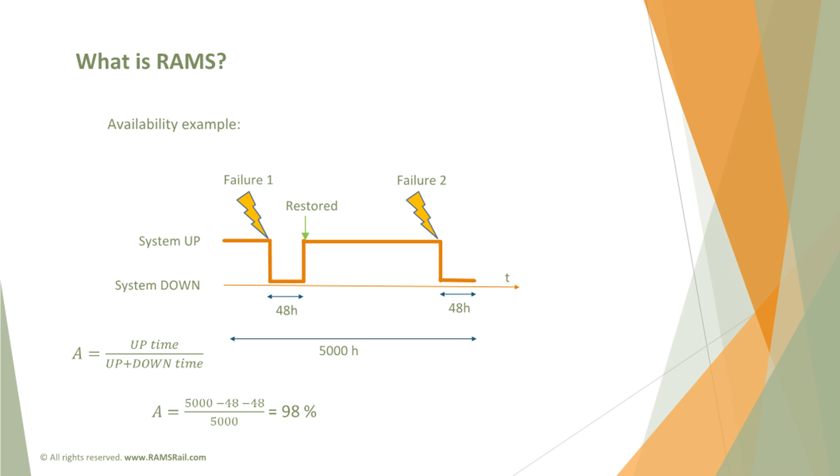A new software standard 50716, released in the end of 2023, merges and replaces the two standards we just saw. The new standard is better aligned with 50126. Readability has been improved and additional guidance added. The old software standards can still be used until October 2026. After that date, the new standard will be the only one defining the software development process for railway applications.

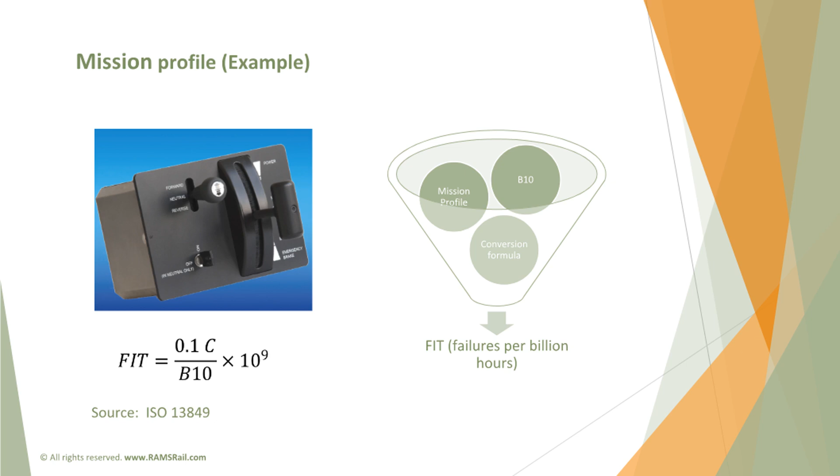The standard 50126 contains a series of tables in Annex C, suggesting the following discrete categories for the classification of the frequency. These 6 categories range from frequent, for hazards occurring more than once every 6 weeks, until highly improbable, for hazards occurring once in 100,000 years or more.

Random failure integrity is that part of the safety integrity which relates to hazardous hardware random faults. They are related to the finite reliability of hardware. Random failure integrity has to be demonstrated by a quantified assessment. This means by probabilistic calculations. This is typically done using the fault tree analysis technique. In special cases, complex systems may also be modeled using Markov chains, Monte Carlo methods, Petri nets, etc.

It is important to highlight at this point that to demonstrate the integrity of our system, it is necessary to satisfy both the systematic and the random failure integrity requirements. It is useless to end up with a system with a really small random dangerous failure rate if later we have not followed any of the techniques and measures to protect the system against systematic faults.

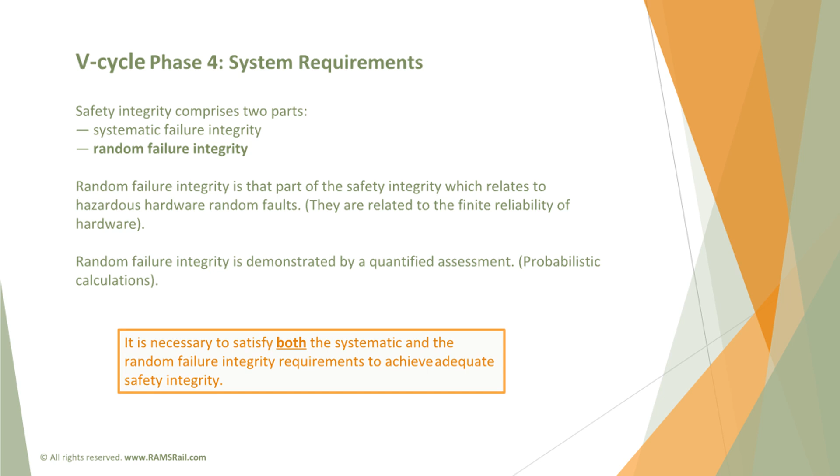A second example of THR apportionment could be the following. Let's imagine we have a level crossing which is protected by 2 fully independent functions. The first function is named lights and acoustic alert. The second function is named lower the mechanical barrier.

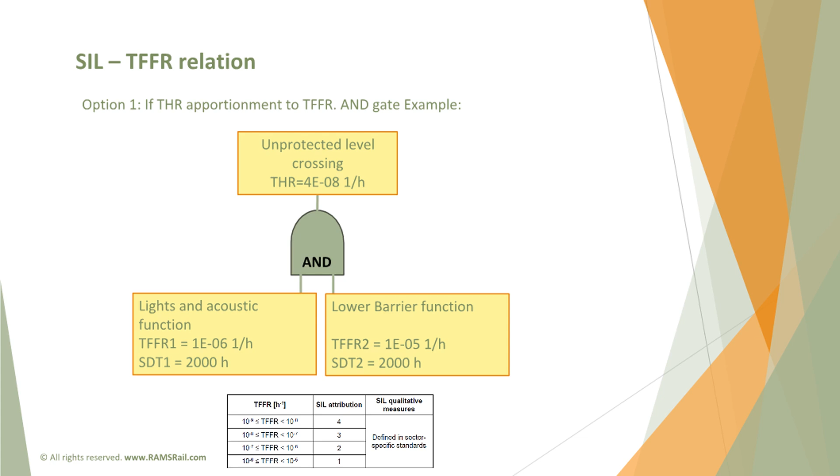If our top event is unprotected level crossing, and we assume human influence, all humans are subject to occasional lapses in performance. When they occur in earlier phases of the life cycle, they can result in systematic failures in the operational phase. When these occur in the operational and maintenance phases of the system life cycle, they could also result in random failures. Please pay attention when you apportion a THR to a function and a human. Do not overestimate humans. Do not use the SIL concept for humans, neither for mechanical parts of the system. Risks related to mechanical parts of the system will typically be managed via codes of practice.

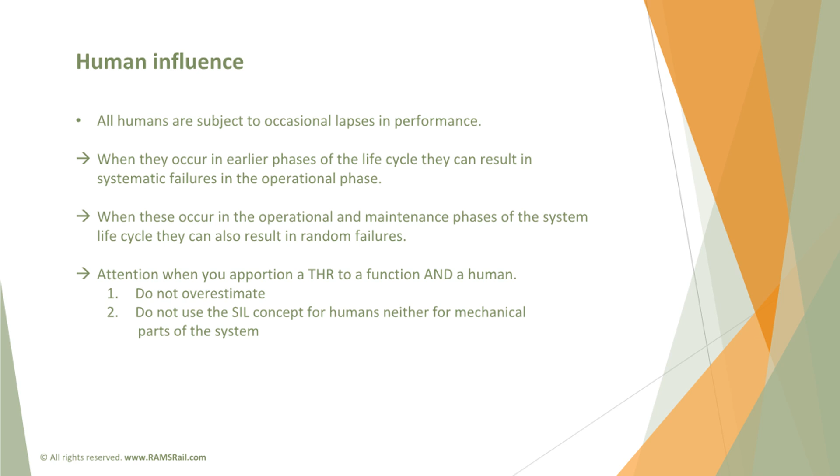On the contrary, validation checks if we are building the right thing, focusing on initial requirements from customer and system level and ensuring they are satisfied at the end of the software cycle.

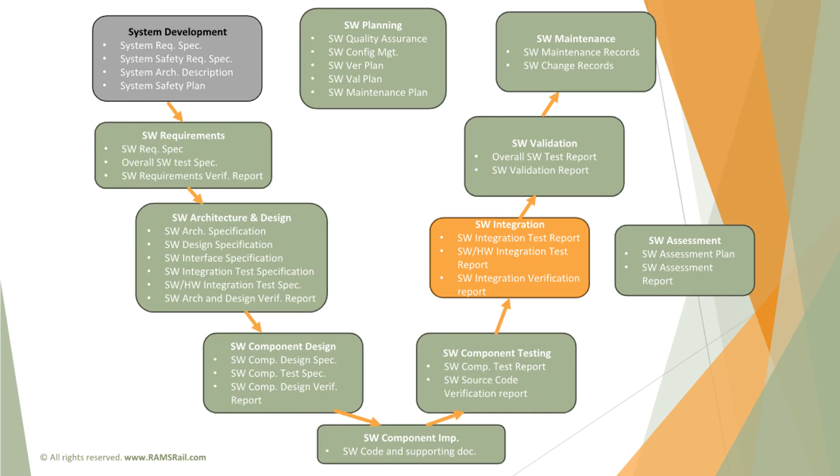In this slide, we introduce different types of performance testing. Let's see them. Load testing checks the software's ability to perform under anticipated user loads. The objective is to identify performance bottlenecks. Stress testing involves testing a software under extreme workloads to see how it handles high traffic or data processing. The objective is to identify the breaking point of an application.

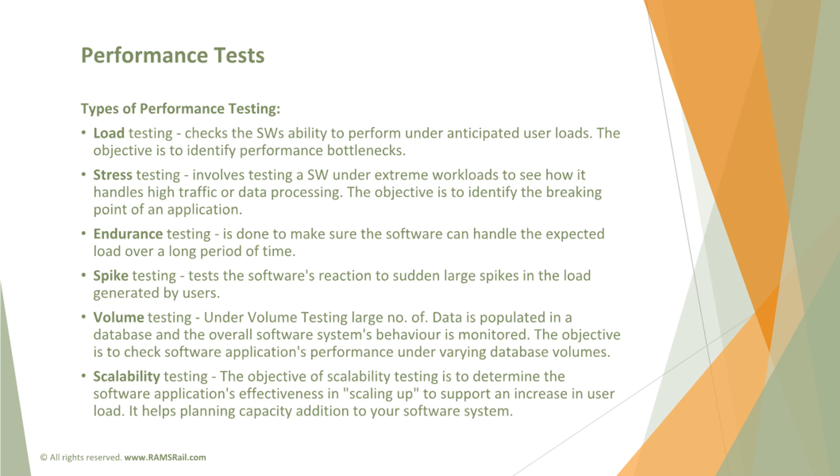Endurance testing. A common cause failure occurs when one event or shared factor causes two or more failures. Because they have one and the same cause, the failures are not statistically independent. This is contrary to the core assumption of usual reliability theory that all failures are independent and uncorrelated.

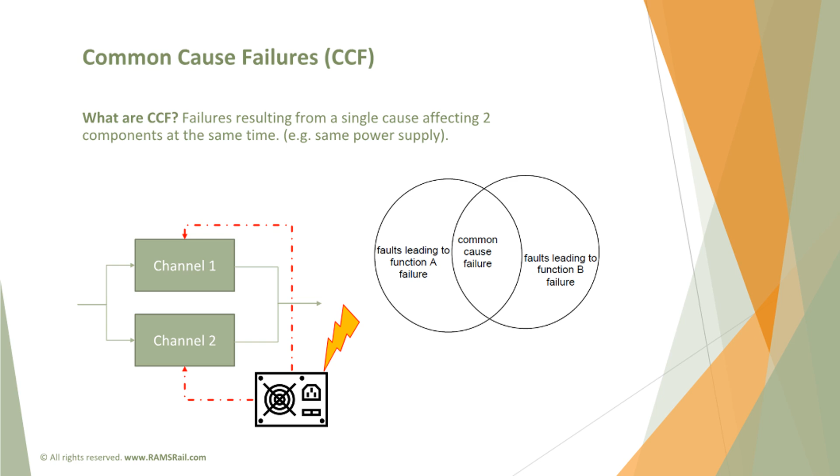Is Regulation 402/2013 mandatory? Depends on your country. In the European Union, all EU regulations are mandatory. The CSMs are directly applicable and enforceable in the member states. Depending on the scope of the change, they are applied either by authorities or bodies, or by specific actors of the railway system, for example, railway undertakings, infrastructure managers, entities in charge of maintenance, or even by both.

How many versions of CSMRA exist? The first version of CSMRA was published in 2009. It is now obsolete in the EU. The second version of CSMRA was published in 2013 and is the current version applied in the EU countries. This new version completely superseded the 2009 version.

One of the main changes against the older version is the definition of strict requirements for an entity to become an ASBO. ASBO stands for Assessment Body and is an independent entity that will make sure that the proposer is applying the CSMRA correctly and that the results are satisfactory.

Once a change has been classified as significant, the next step is to prepare an accurate system definition. The system definition shall address at least the following issues: system objective. This means what is the intended purpose. System functions and elements, including human, technical, and operational elements.